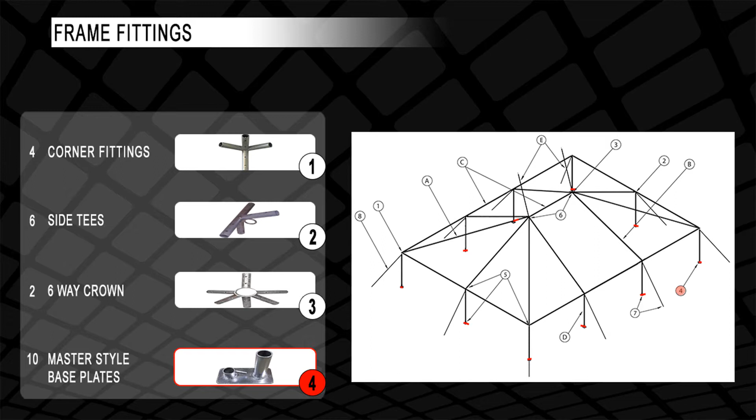Step 1. Lay out the frame parts on the ground in the approximate location that they will be when the frame is assembled. The perimeter parts are laid out to form the perimeter of the tent, and the roof support parts are placed in the interior in their general locations.

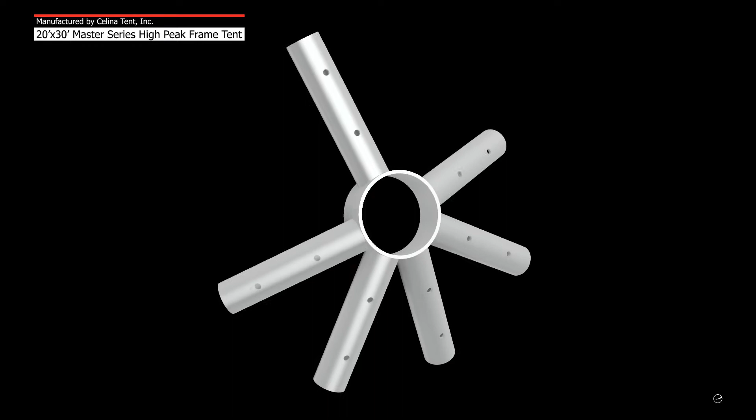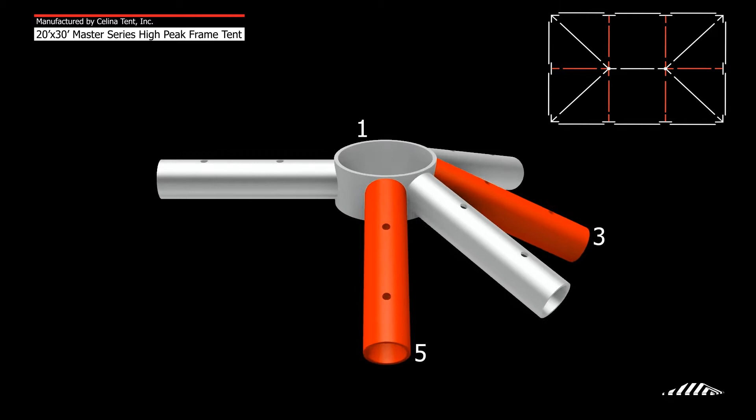Step 2. Begin with one of the 6-way crowns. Lay the crown on a flat surface to determine the correct placement. When the crown is on a flat surface, the angles that are not touching the ground will correlate with the two corners, point 2 and point 4. The angles that are touching the ground will correlate with the 3 side tees, points 1, 3, and 5. The last protrusion, point 6, which is horizontal, will correlate with the other 6-way crown.

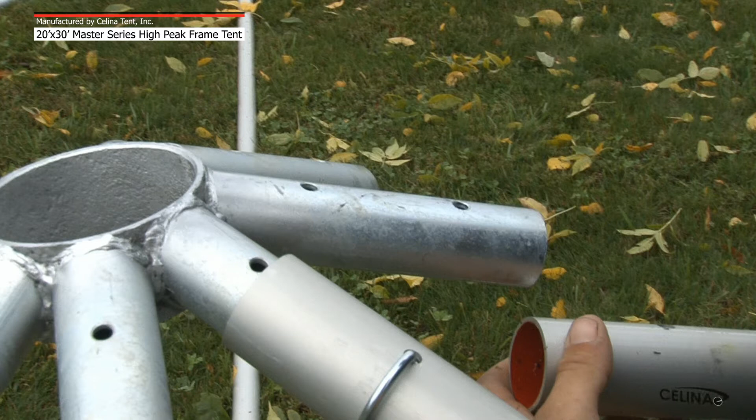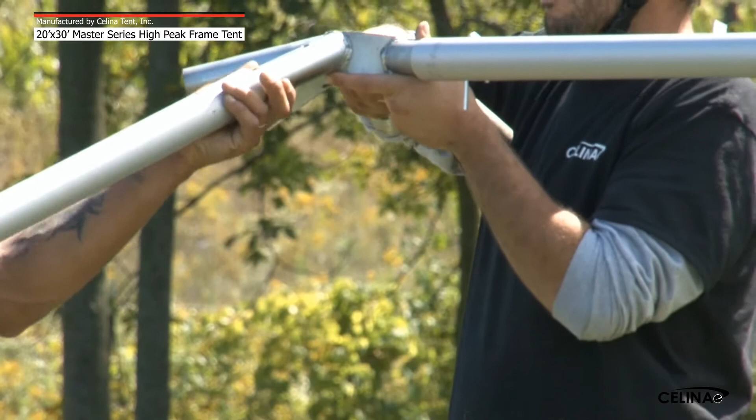Starting at point 1 on the 6-way crown, attach the 10-foot, 6-inch rafter pole to the fitting. There are 2 holes located in each protrusion of the frame tent fitting. The first hole, which is furthest from the center of the fitting, is for the R-pin that secures the pole in place. The second hole, which is located closest to the center of the fitting, is an alignment hole. Slide the pole on the protrusion so the holes on the pole and the hole furthest from the center on the fitting are aligned properly. Insert a pin in the holes to secure the pole in place.

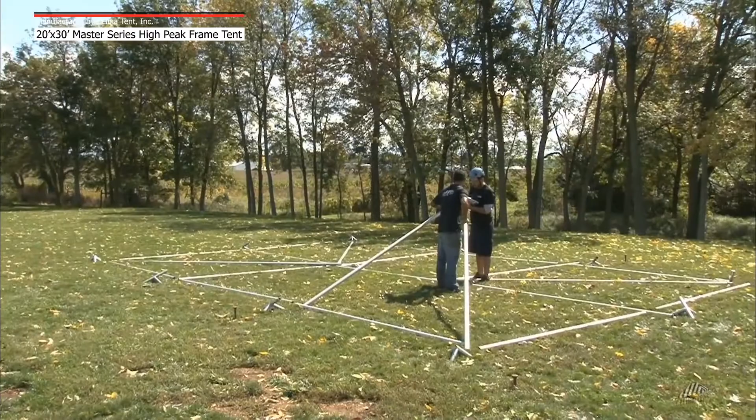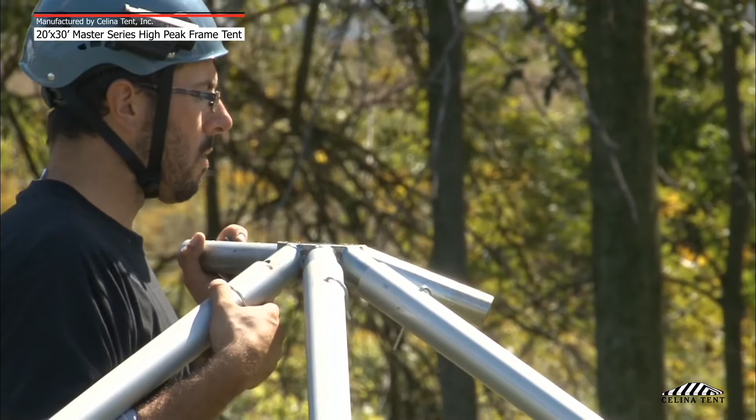Attach the 14-foot 4-inch hip rafter pole to the 6-way crown at the second point using the same method as above. Working around the 6-way crown, continue to attach the rafter poles at the 3rd and 5th points and the hip rafter pole at the 4th point, securing the poles to the fitting with a pin.

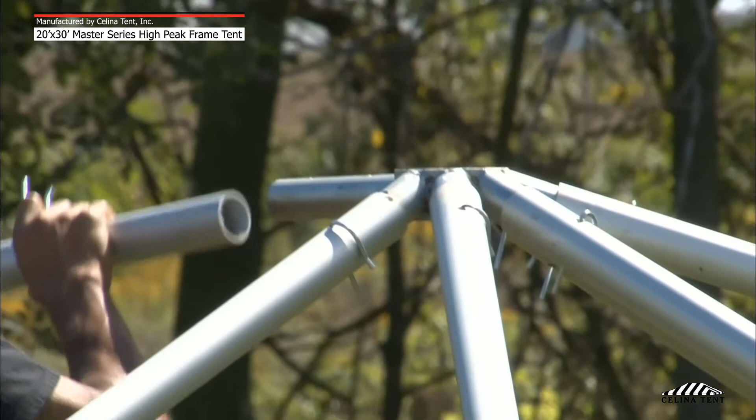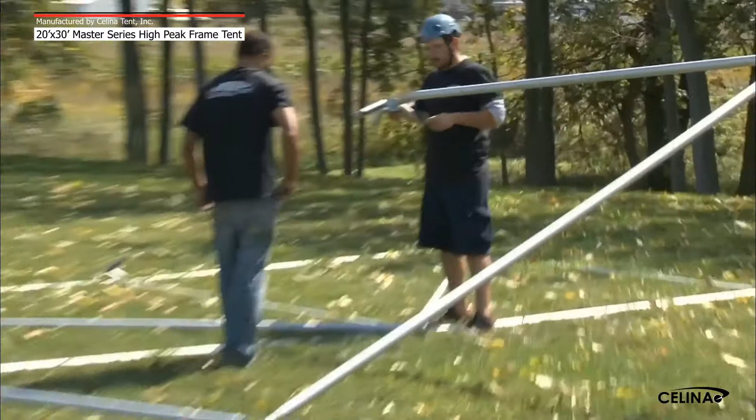Step 3. When the rafter and hip rafter poles are attached to the 6-way crown, attach a 9-foot, 4-inch spreader pole to the 6-way crown at the 6th point. This spreader pole will attach both 6-way crowns together, creating the peak of the tent. Secure the pole to both of the fittings with a pin. Repeat step 2 with the second 6-way crown.

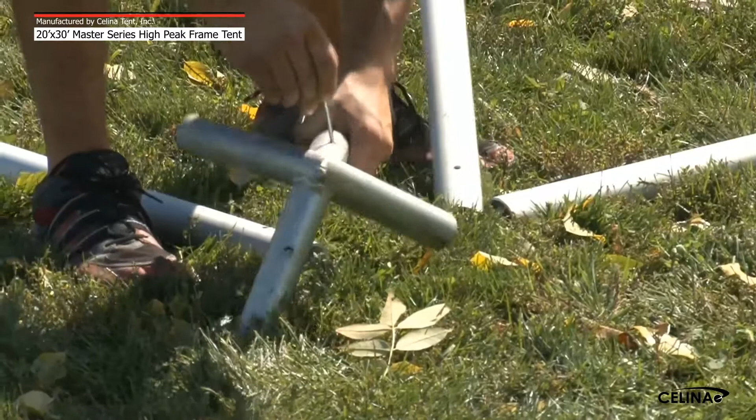Step 4. Attach the corner fitting to the hip rafters by sliding the pole over the fitting. Line up the holes of the pole with the hole furthest from the center of the fitting and secure with a pin. Repeat this method to attach the side T fittings to the rafter poles.

Step 5. The perimeter is now ready for assembly. Connect the side T's to the corners and connect the side T's to the side T's using the 9-foot, 4-inch spreader pole. Line up the holes in the pole and fitting and secure with a pin. The last spreader pole connected to complete the frame should be located at a corner, not a side T.

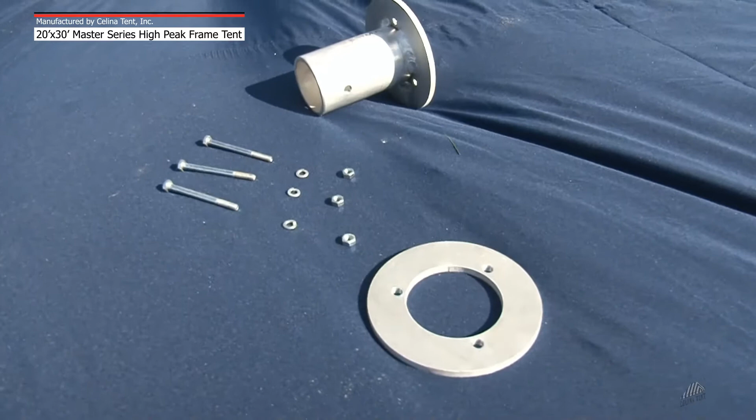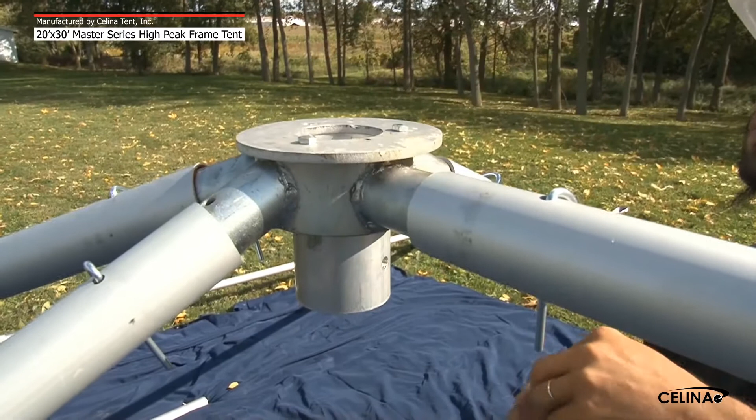Step 6. When all of the spreader poles have been secured, attach the crown adapters to both 6-way crowns. Place the adapter through the center circle of the 6-way crown. Insert a bolt through the 3 holes on top of the adapter. Slide the ring assembly over the bottom of the adapter, lining up the bolts through the holes in the ring. Secure the ring adapter by attaching the nut and lock washers to the bolts. Repeat this method to attach the second crown adapter to the second 6-way crown.

Step 7. Unfold the drop cloth next to the tent frame assembly. Pull the drop cloth under the tent frame to cover all areas. Always use a drop cloth. Be sure all areas are covered to prevent damage and or dirt from touching the tent top. Place the tent top on the drop cloth and unroll and unfold. If a section must be moved or relocated, do not drag it. The section must be picked up and carried to the desired location.

Step 8. The tent top is now ready to be placed over the frame. With the tent top closest to the frame, pull the fabric up the frame, lifting up as you move. This allows the tent top to ride on a cushion of air. Pull the tent top up and over the peak of the frame.

Use extreme caution when pulling the tent fabric over the frame. Watch that the fabric does not get caught on any hardware that would rip or puncture the top. Position the tent top so it is centered on the frame.

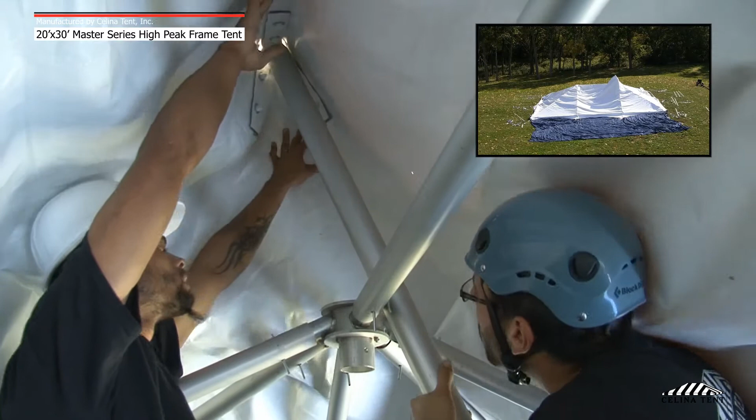Step 9. The 4-foot 9-inch center poles are now ready to be set. Insert the pole pin through the first ring assembly in the tent top. Be sure not to pinch or puncture the tent top fabric. Place the bottom of the center pole through the crown adapter.

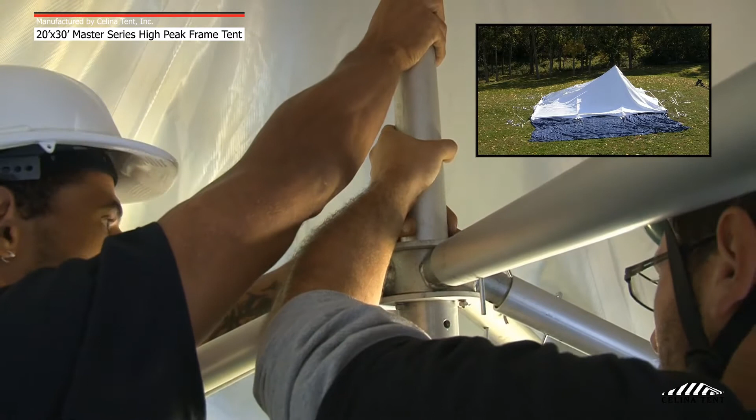Lining up the center hole in the pole with the hole on the adapter, secure the center pole to the crown adapter with a bolt and nut. Repeat this method to insert the second center pole.

Step 10. Attach a loop end ratchet strap to all corners and side tees. Wrap the strap around the fitting. Pull the flat end through the loop and tighten around the fitting. These straps will be used to secure the tent with the ratchet buckle assemblies and straps attached to the tent stakes around the perimeter of the tent.

At each corner and side tee location are 2 rings attached to the tent top fabric. Secure the tent top by taking a loop end ratchet strap and pull it through both rings. Pull the flat end through the loop end and tighten to connect both rings together.

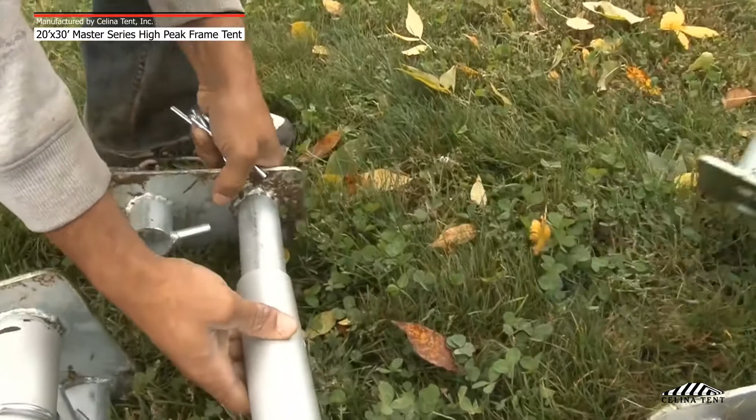Step 11. Attach the master style base plates to the legs by sliding the 6-foot 8-inch leg pole over the longer tube on the base plate and secure with a pin.

Step 12. Lifting the tent on one side at a time, use frame tent jacks to tip the entire side of the frame. To increase stability during use, insert 2 standard stakes in the base of the jack. Position the jack close to the fitting location and place the hook around the perimeter tubing of the frame.

Working in unison, turn the handle to raise the frame until the corner legs with base plates can be installed. Position the legs so that the smaller tube on the base plate is facing out. This will allow the D-ring on the ratchet assembly to easily fit onto the base plate hook feature welded on the small tube. Pin the leg to the fitting.

Repeat the above method to lift the other side of the frame. Remove the frame tent jacks. When the tent frame assembly is no longer touching the ground, the drop cloth can be removed. Once the corner legs are secured, slide the leg poles over the side T fittings with the smaller tube facing out and pin the leg to the fitting.

Step 13. Now that the frame tent is standing, make sure that all the straps are tight and that the tent top is sitting evenly on the frame. Attach the D-ring straps to the hook assemblies on each base plate.

Feed the end of the top straps attached to the tent top through the ratchet buckle and tighten the straps until the tent top is tensioned. Roll up excess ratchet strap into the ratchet buckle.

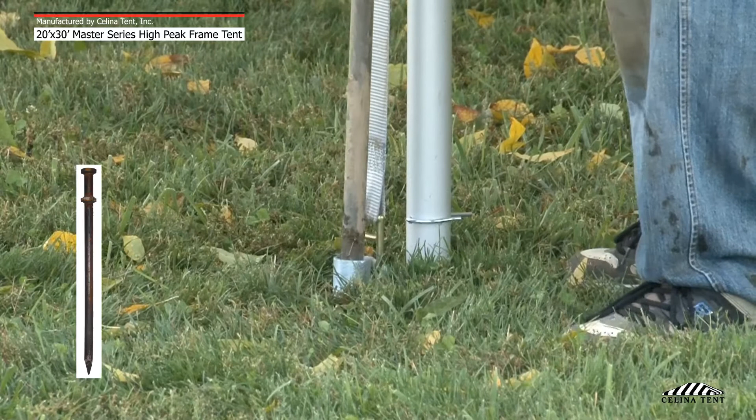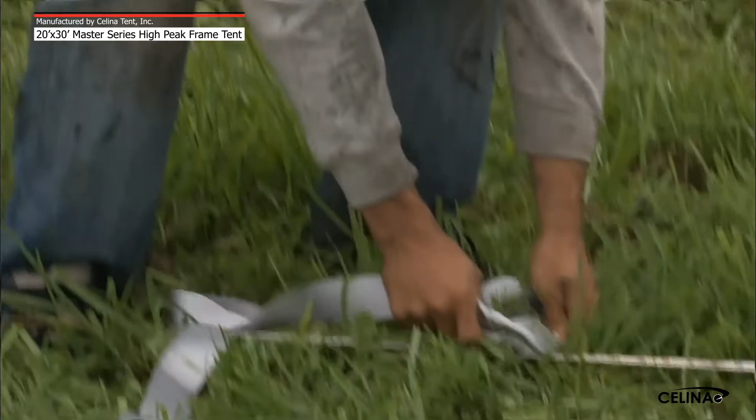Drive stakes into the ground vertically until 6 inches or less of the stake remains exposed. Install a double head tent stake through the smaller tube on the base plate at each base plate location. Attach the ratchet buckle assemblies to the tent stakes that are placed 4 feet from the legs. Turn the end of the ratchet inside out and pull the strap through the loop to create a noose and pull tight over the stake.

Take the top strap attached to the tent top frame and feed the end of the strap through the rear bar slot of the ratchet. Tighten the ratchets until the frame is stabilized. Roll up excess ratchet strap into the ratchet buckle. The frame tent should now be complete. If sidewalls are desired, clip the sidewall snap hook to the rope line that is attached to the tent top.